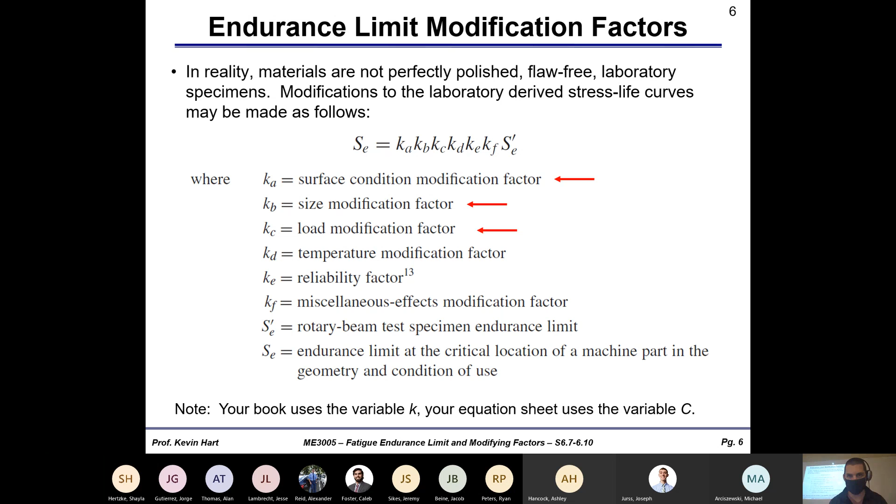Someone mentioned temperature - I think that was Jorge. There are temperature modifications as well, but we don't really deal with that in this class, just for time reasons.

Okay, so we talked about surface modification here. It's A times SUT to the B, where A and B are coefficients gotten from experiment, based on a variety of different surface types that we have. We did an example problem, then we talked about size correction.

Size correction is a little strange in that you're basically accounting for a variation in surface area to volume ratio. The more surface area you have on your piece, the higher the probability of your piece failing prematurely from this cyclic stress we're applying. This chart is trying to correct for the fact that you might have different sizes of pieces - and not just different sizes, but different shapes, and not just different shapes, but different loading types.

So we also talked about the difference between rotating and non-rotating bending. Rotating is like on a motor, where all points on the outside of the body experience the same maximum compression and tension, versus non-rotating bending, where only the top and bottom pieces experience the maximum compression and tension. We did an example problem showing rotating versus non-rotating behavior.

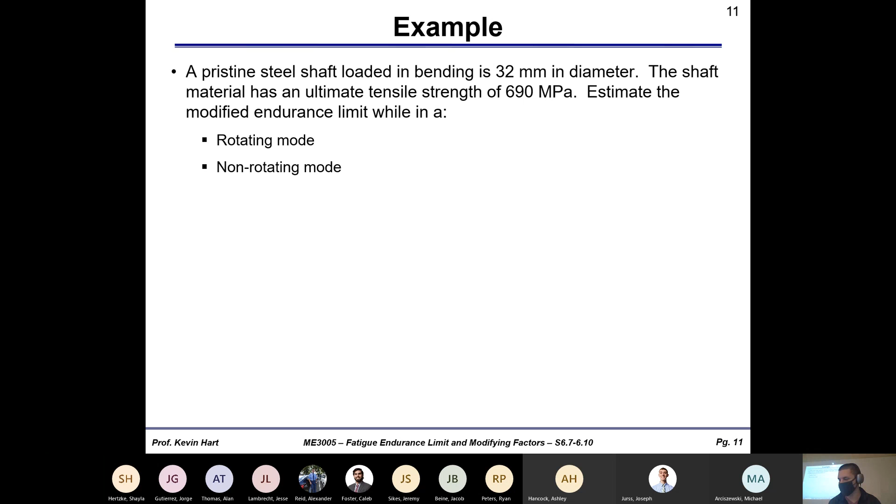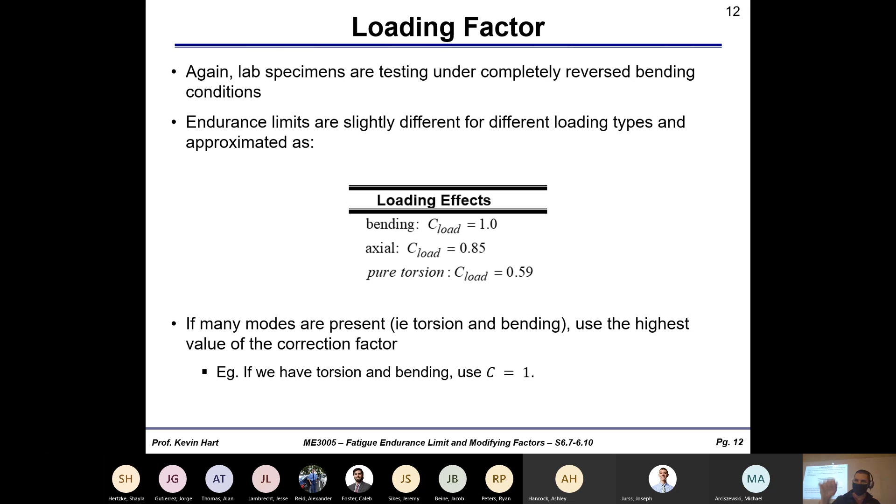Finally, we concluded last time with our correction factors looking at load corrections, modifying endurance limits for the loading types we might have. Bending looks like this, axial loading is like tension-compression over and over, and torsion looks like this - say, revving the engine on a motorcycle over and over, that's some sort of torsional effect.

We also talked about stress concentration factors - static and fatigue concentration factors. If you go to the back of any good mechanics textbook, you'll see a bunch of charts that lay out static stress concentration factors.

We talked about what those are, with the classic example of a hole in a plate. The idea is that stress is amplified around stress concentrators, like holes, fillets, or radii inside your piece. Stress is amplified in a static condition, following charts like this. If you have a certain hole diameter versus the width of the plate, you can determine your static stress concentration factor given that particular ratio. It's pretty straightforward.

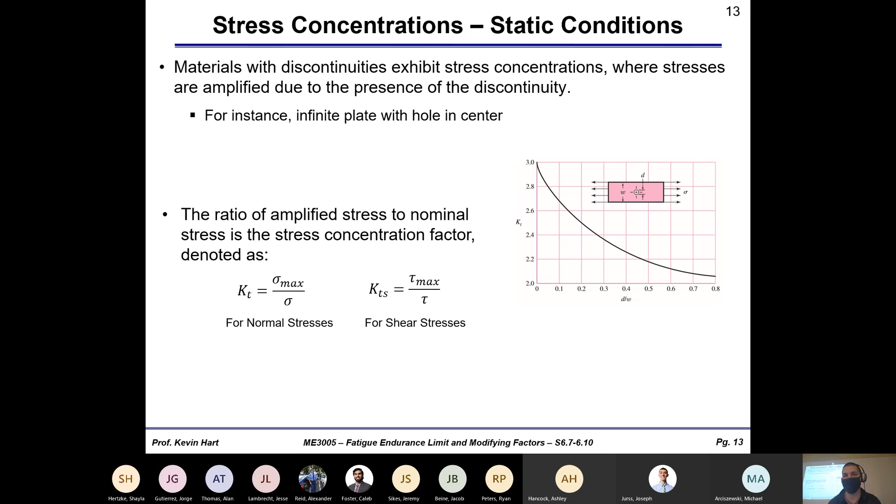This is pretty easy to get for static conditions, but we need an additional piece of information to calculate our fatigue stress concentration factor, and it's different than the static factor. So don't go and use the static factor on the test - you've got to use the fatigue concentration factor, which is slightly different.

The fatigue concentration factor is a similar idea - what is the maximum stress around this stress concentrator, a fillet, a notch, a hole, etc., divided by the stress amplitude that we apply, or the shear amplitude that we apply.

And we need an additional correction factor, which we call notch sensitivity. We talked about notch sensitivity last time - it's an additional constant based on how tough the material is, which will either further amplify or keep the static stress concentration factor the same as we move to a fatigue stress concentration factor.

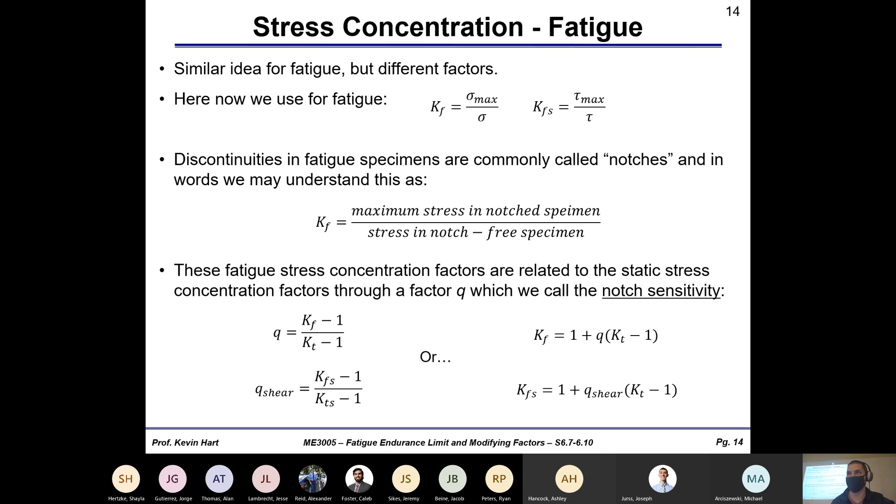Famous phrase - it is what it is.

Let's continue now with the lecture, and we're going to move on and talk now about... some of the - oh man, I have issues with my writing pad. Come on, turn it off, turn it back on.

Sometimes when I connect the writing pad, the pen doesn't sync up with where I'm actually touching on the pad. Okay, so turn it off, turn it back on, and it works, just like everything in engineering.

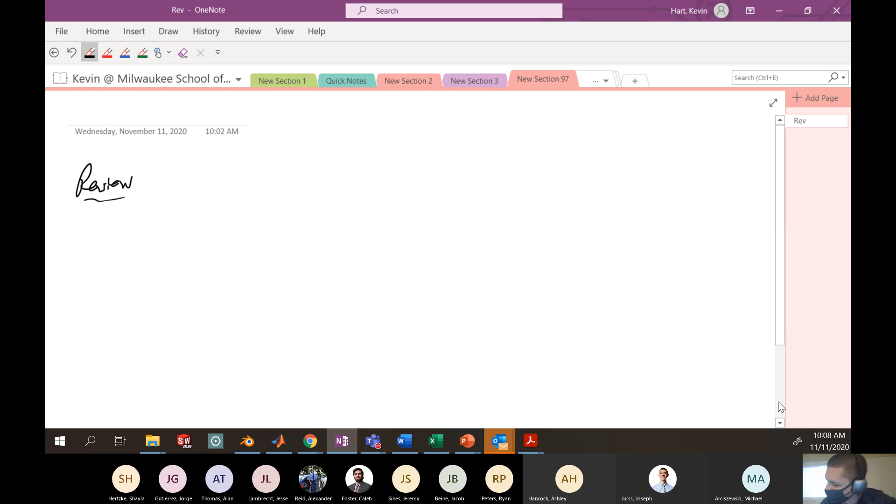All right, so what we've talked about so far, quickly: your endurance curve is something that looks like this. Number of cycles to failure on one axis, stress amplitude on the other. Here is your ultimate tensile strength, SUT, and we saw that we generally have lines that look something like this. This is a gross exaggeration, but you get the idea. And here, this is your endurance limit, SE.

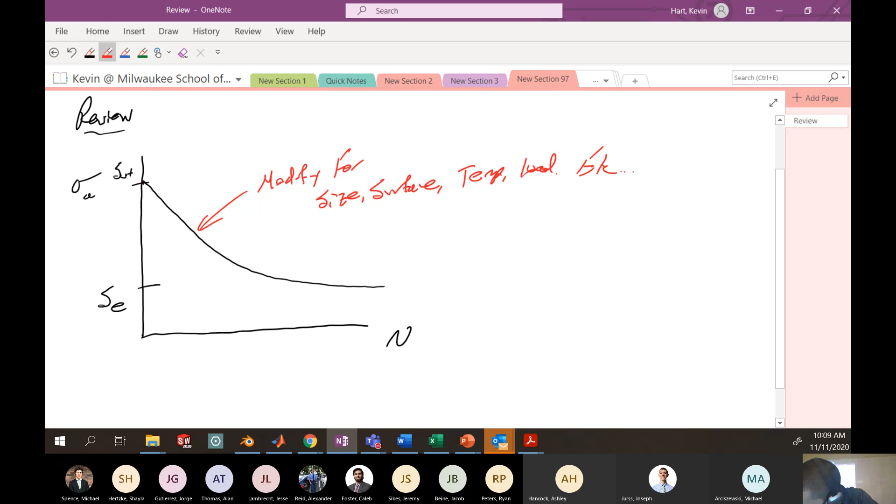And we know that we can modify this endurance limit and basically modify these curves for size, surface, temperature, load, etc. All the modifications we've done so far tell us how to modify this curve based on these phenomena. And so some modified curves that we might see might look something like this.

Oh boy, it's like that. I want it to plateau. So here might be some modified curve. You might get a modified curve that's slightly lower than what you get from the R.R. Moore high-speed test. So this here is like pristine test, and these are like modified.

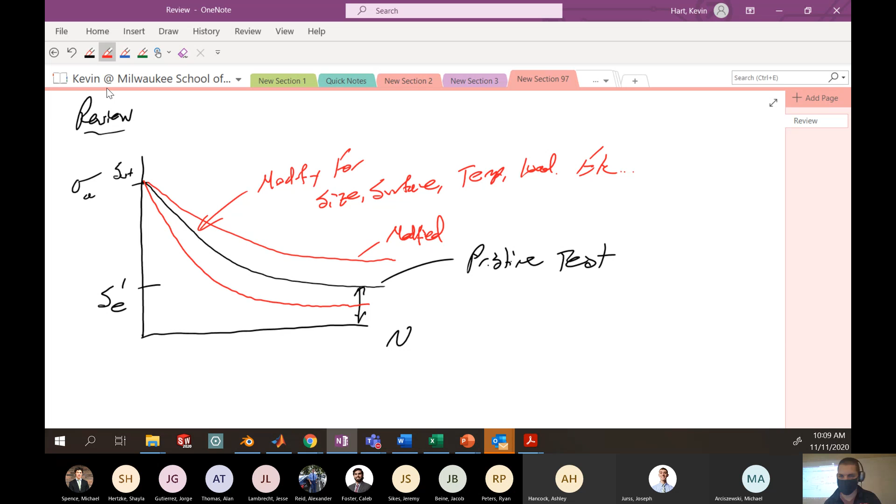If we run a pristine test, we get the pristine endurance limit, which is like this value here, which we know is SE prime. This is the pristine endurance limit. And the modifications that we've made based on size, surface, etc., are giving us these values here. This is like a modified endurance limit, SE, for size, temperature, etc.

We might also have a different modified endurance limit here, which is modified by size, surface, temperature. Maybe we have a much smaller size, so a higher surface area to volume ratio. Fine, we have a different modified endurance limit.

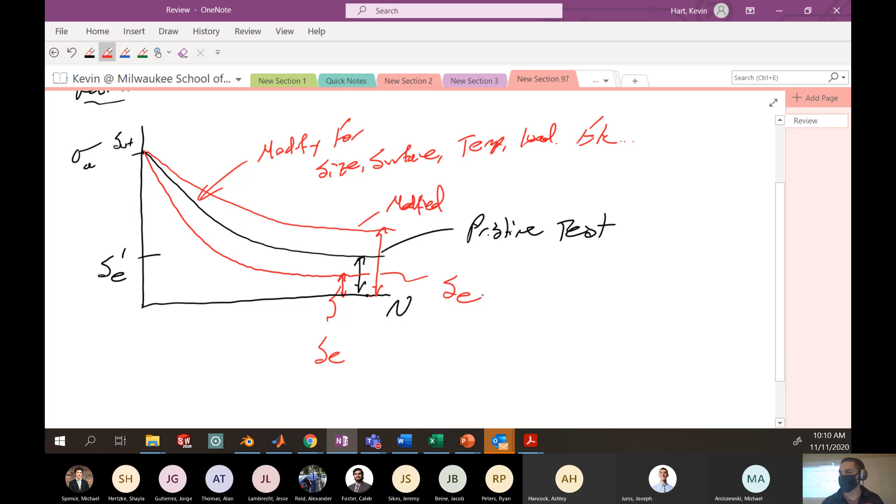So everything we've done so far has been just looking at how the endurance limit changes, how we get a modified endurance limit from a pristine endurance limit. But we're neglecting a huge portion of this endurance curve, basically everything that's going on up until the endurance limit. We're neglecting all of that information so far.

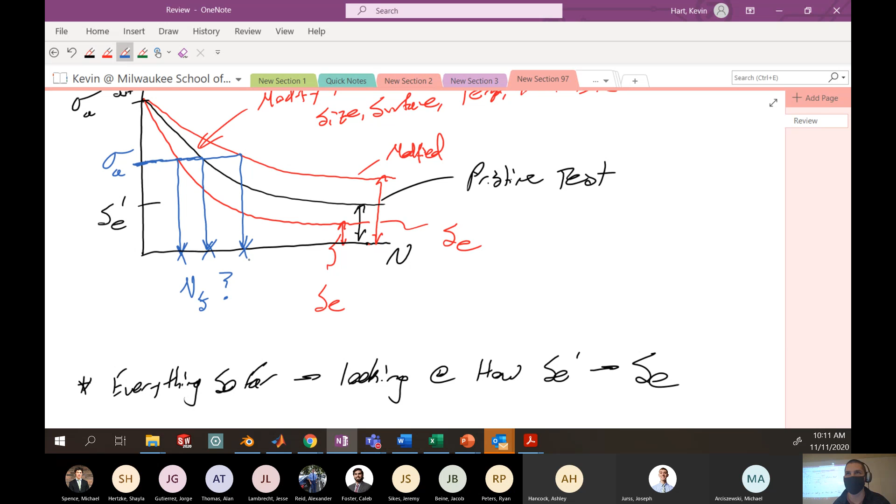Yes, it's nice that we can calculate a modified endurance limit, but what about everything happening before we get to the endurance limit? It would be nice if we could come up with some expression that allowed us to calculate: if I have some applied load, some stress amplitude here, how many cycles am I going to get to failure? Which would be like these x-axis values. It would be nice if we could come up with an expression based on modifications to the endurance curve that would allow us to predict number of cycles to failure given some applied stress amplitude greater than the endurance limit. Hopefully this makes sense.

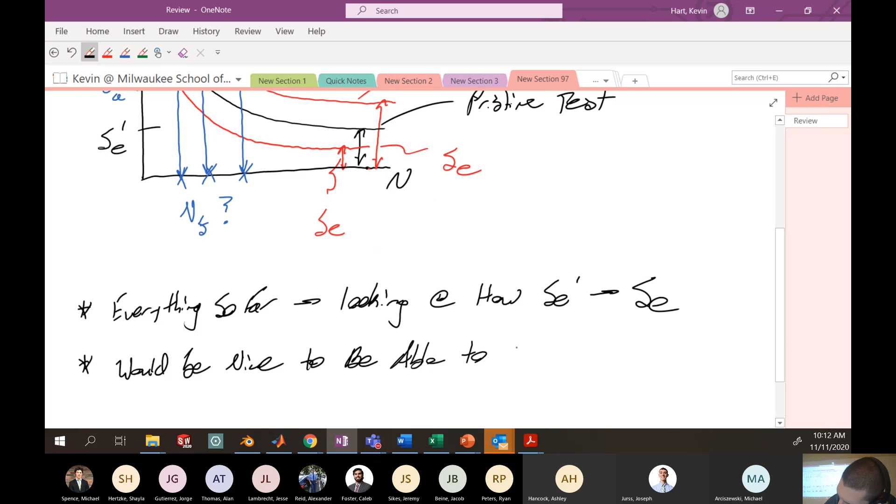So let's put this in words. Would be nice to be able to predict number of cycles to failure if my stress amplitude that I'm applying is larger than my endurance limit—a modified endurance limit. So take into account the size, take into account the surface, take into account the loading type, etc., and then modify what that endurance curve looks like, and give us some prediction for what is this number of cycles to failure given some stress amplitude.

Would be nice. There are a lot of models that do this. We're only going to talk about the model that is specifically used for steel with high cycle failure. There are many models that do this, but we're specifically going to focus on just one because, you know, complicated.

Just a second. My notes not include... oh, my notes aren't including this information. I think I might have given you guys a bad set of notes. Do you guys have slides 15 and 16 on your electronic copies of your notes or not? Oh yeah, okay, you do have it. For some reason I just don't have it here in front of me. But that's okay, I can make it happen. All right, so let's talk about this: estimating cycles to failure. I don't need no notes.

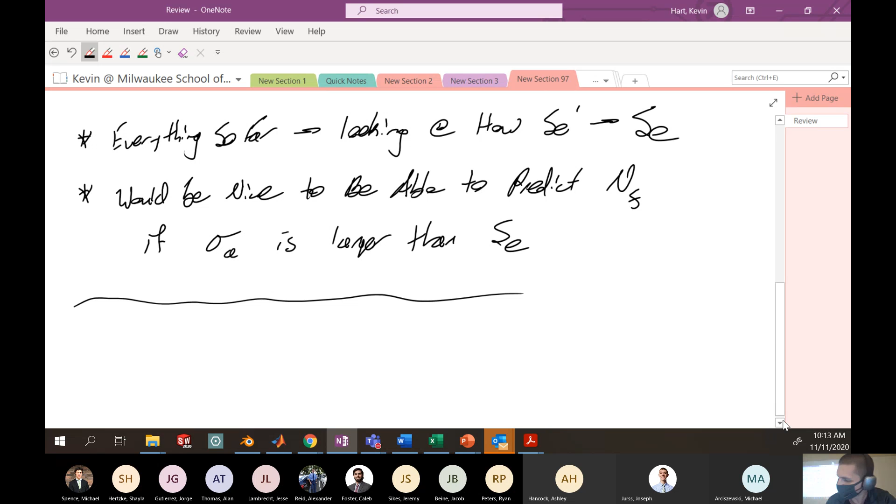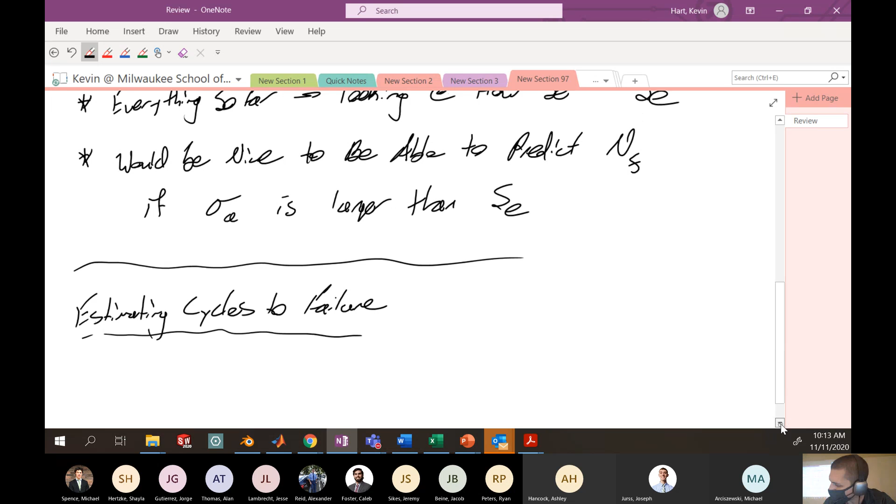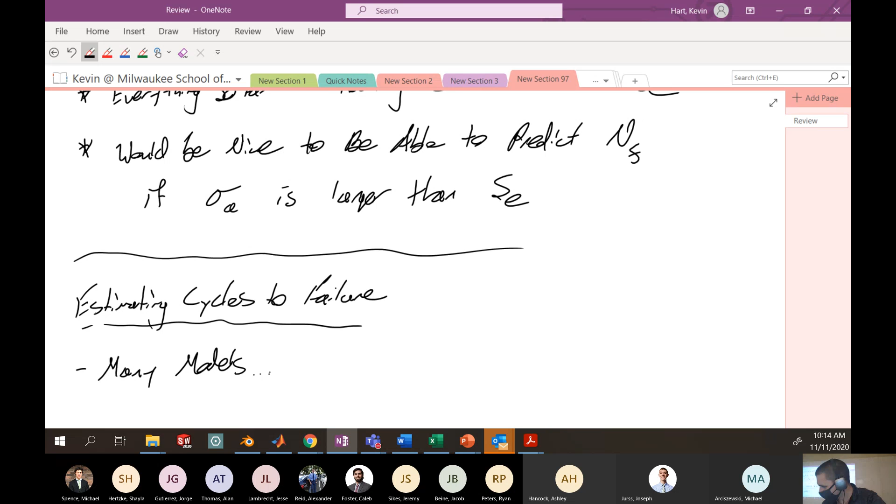All right, there are many models that exist. The only one we're going to focus on here is a model for completely reversed stress.

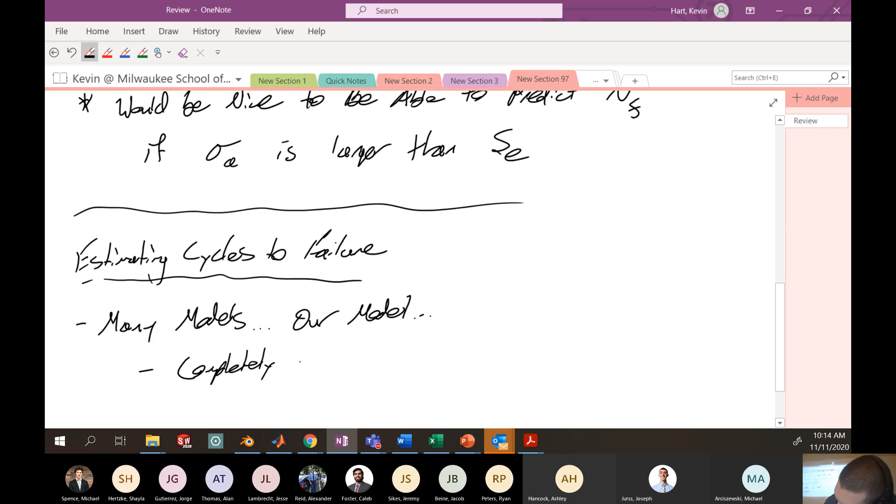Has the following: completely reversed stress state. What this basically means is that my mean stress is 0. Remember when we talk about cyclical fatigue that we apply, when we have completely reversed stress, that means we have an equal amount of compression and tension being applied on our piece. So the mean stress is 0.

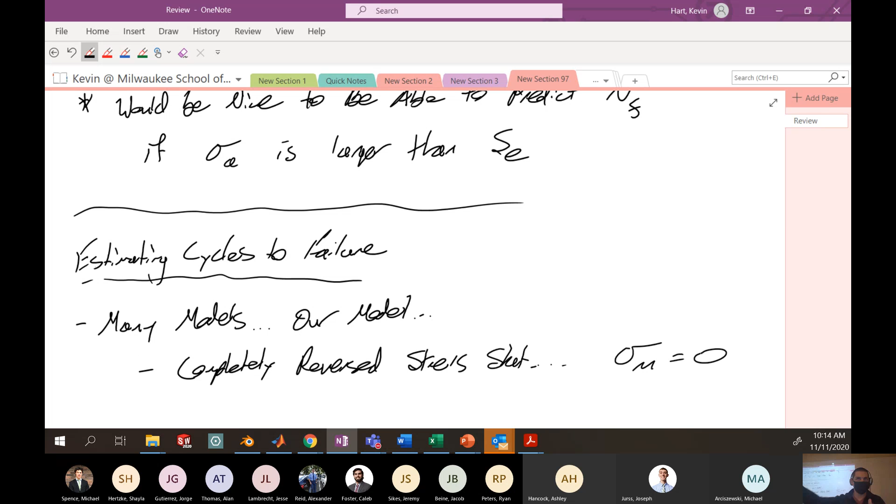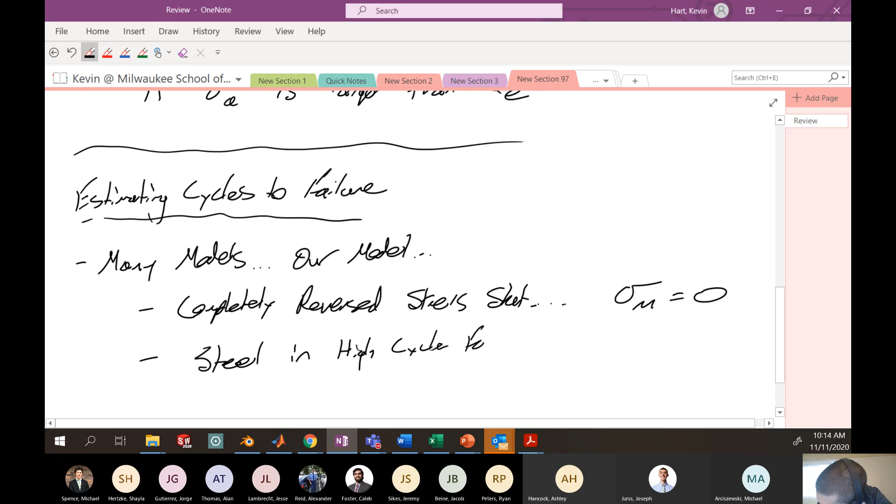And we have steel, which is in sort of high cycle fatigue. So what do I mean by that? We have numbers of cycles to failure that are somewhere between, let's say, 1,000 and 10 million. So 10 to the 7th on the high end, and on the low end, 10 to the 3rd. That's approximately the values that we want.

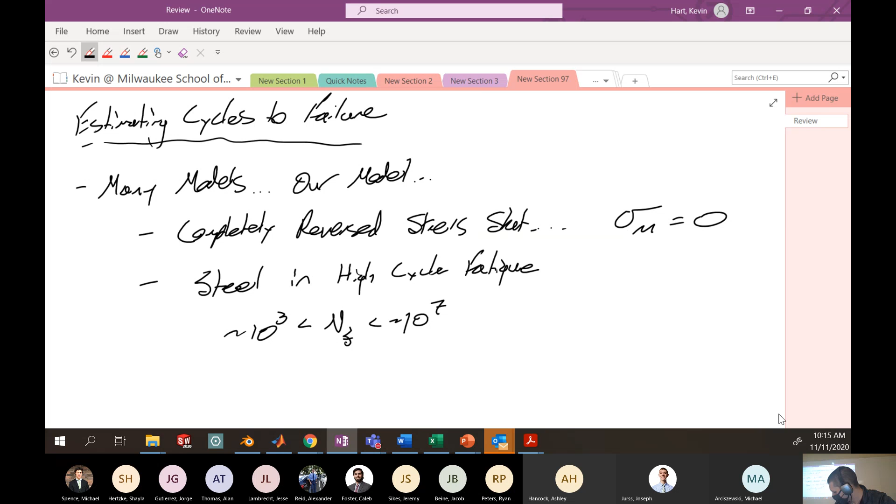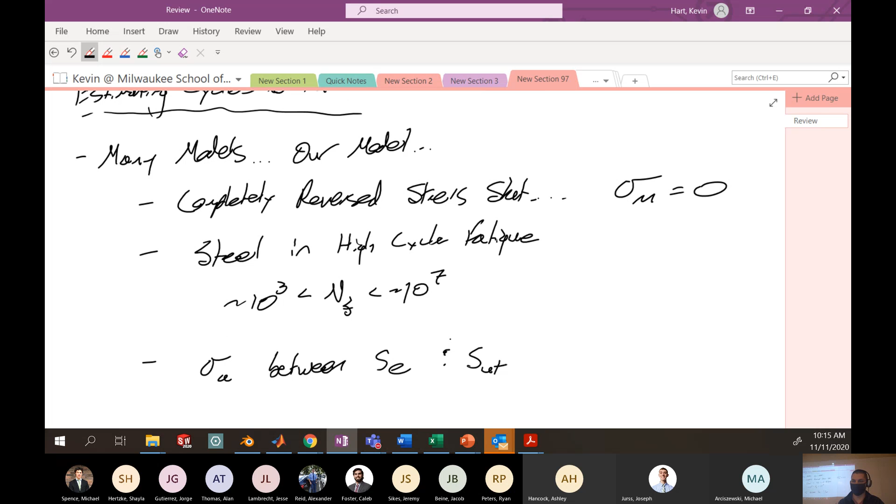And the last thing I'll say here is that we have to have a load that's applied between the endurance limit and the ultimate tensile strength, obviously. That gets us in the region that would give us some predictable cycles to failure. If you have a stress amplitude that's below the endurance limit, you're never going to fail. And if you have a stress amplitude that's above the ultimate tensile strength, you're just going to fail after one cycle. So that's the general range we're interested in here.

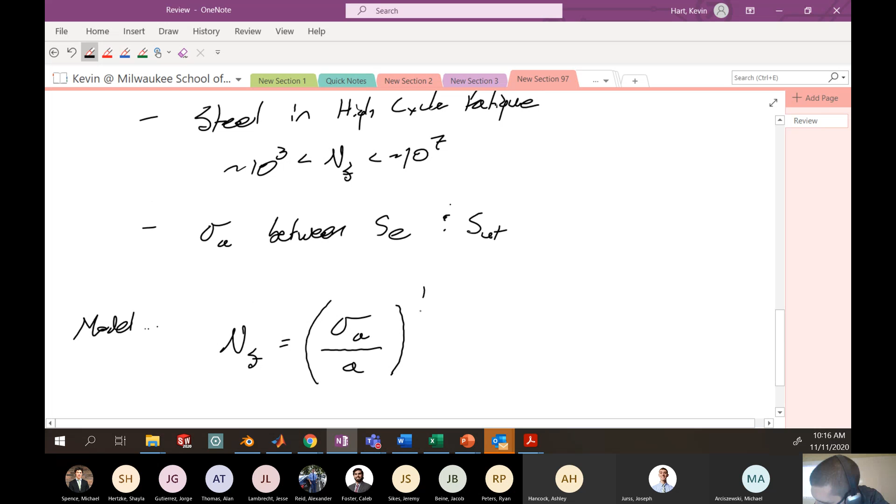Okay, so here's the model. And again, this is empirical, but here's the model: number of cycles to failure equals the stress amplitude divided by a constant A. This is not the same constant A from surface modification, this is a different constant, raised to the one over B. So here's your model with all those assumptions laid out.

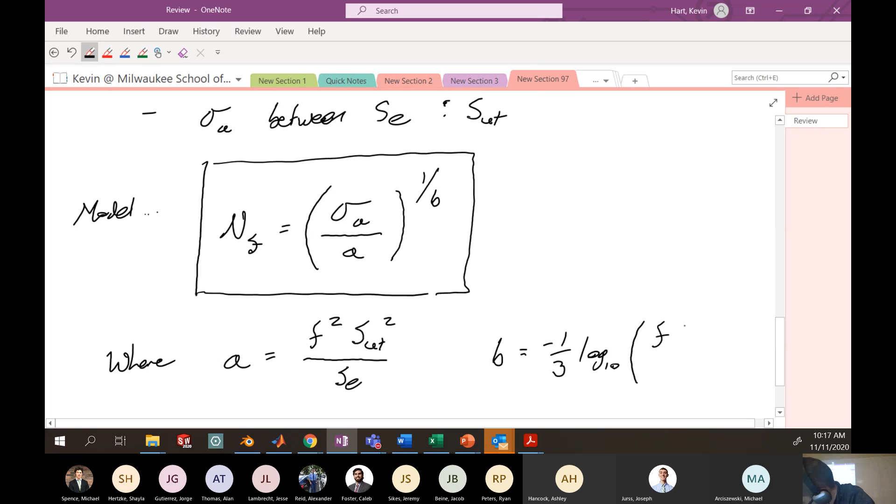We have some constants we need to worry about. This constant A here is what we call the fatigue strength fraction, little f squared, times the ultimate tensile strength, SUT squared, all over the modified endurance limit, SE. B is negative one-third log base 10 - this is not natural log, it's base 10 - of the fatigue strength fraction f, SUT ultimate tensile strength, over modified endurance limit.

Okay, I'm not going to define these, I think all these things are kind of well defined, except maybe we should define little f. This is the fatigue strength fraction.

The fatigue strength fraction, this just comes from experiment. Everything just comes from experiment. Just do experiments - if you don't know what you're doing, just do an experiment. That seems to be the method here. So let me get my fatigue strength fraction chart.

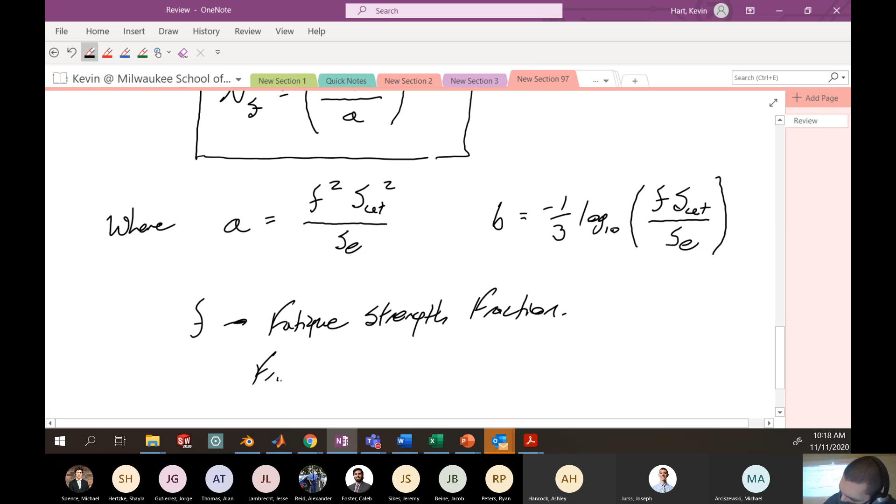Here it looks something like this. This kind of comes from your Shigley book. The fatigue strength fraction F, this little script F here, is based on the ultimate tensile strength of the steel that you have. So the lower the ultimate tensile strength, the higher the fatigue strength fraction. And here it's going to range usually from like 0.75 to 0.9, depending on the ultimate tensile strength of your steel. So a lot of just empirical stuff that you have to keep track of.

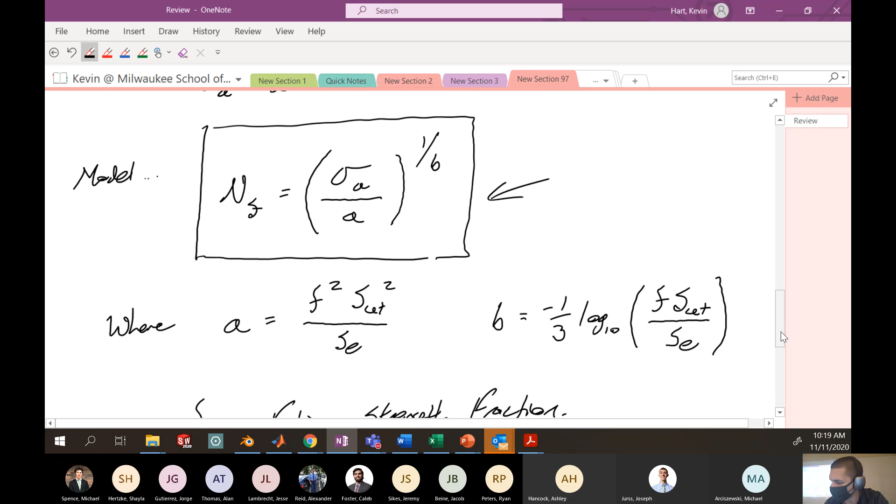So there you go, that's your model for calculating cycles to failure, given some stress amplitude that's applied between your ultimate tensile strength and your endurance limit. So specifically for steel, specifically for high cycle fatigue.

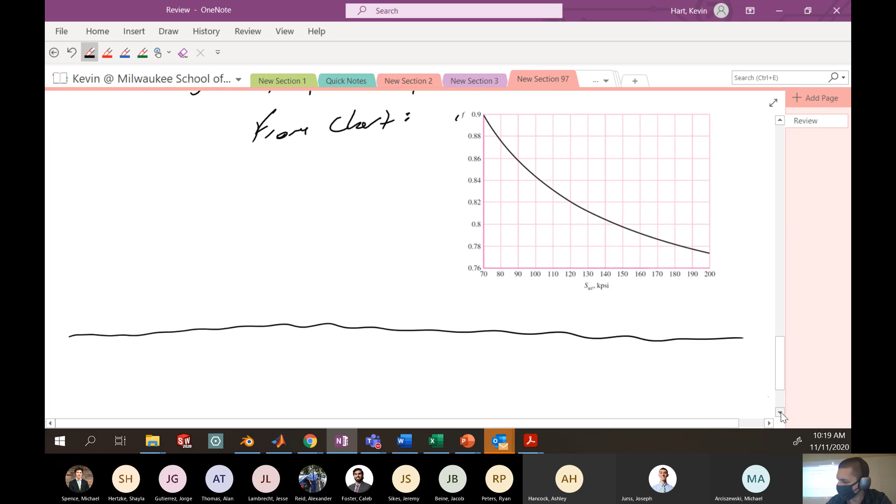Let's put it all together, let's do an example. A complicated example, but it is one that sort of brings together every single thing about fatigue that we've talked about so far. This comes from page 17 of your notes.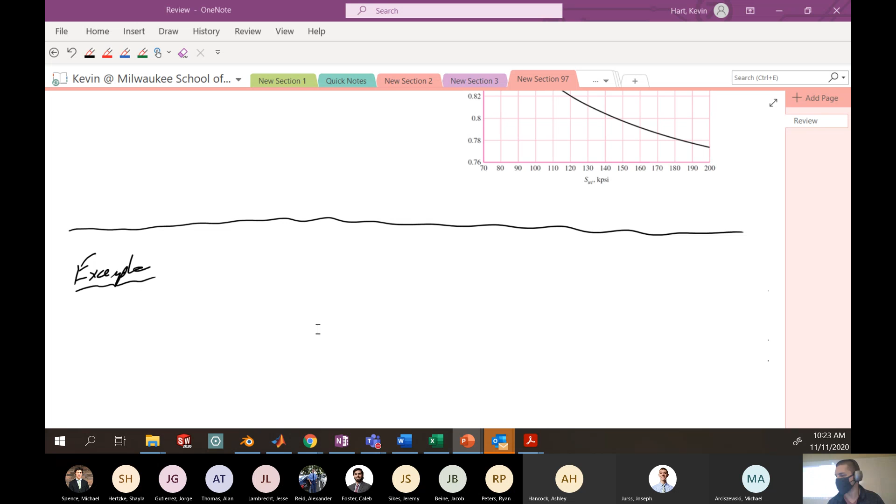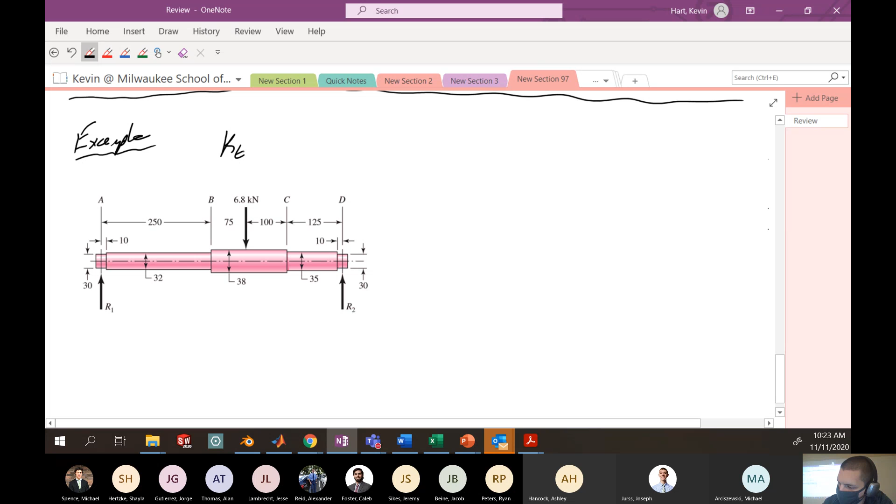Okay, so here we are. This is sort of the shaft that we have in question here. A couple pieces of information that I'll note here. We have static stress concentration factors at each one of the shoulders, which is 1.65. It's important to know.

We have ultimate tensile strength, 690 MPa. This is made out of steel. And we have a yield stress, which will come into this later, 590 MPa.

First thing we're asked to find, part A, the modified endurance limit at point B, which is here on the structure.

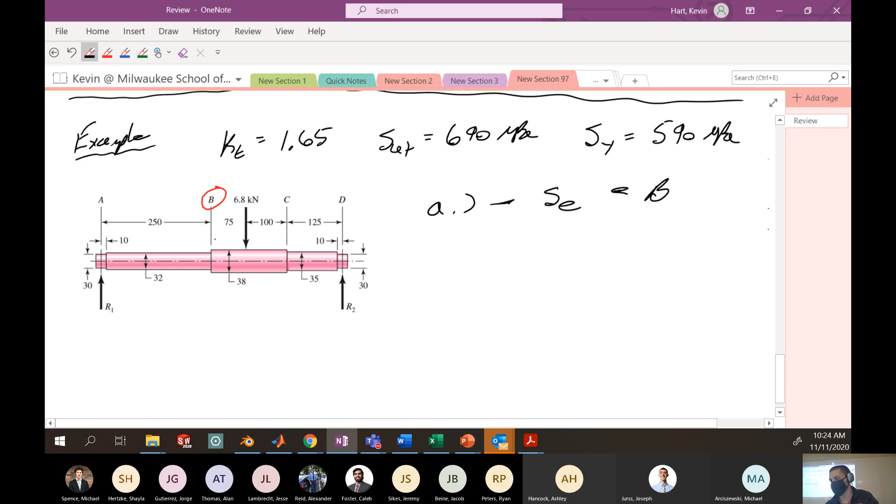This is kind of our point of interest here. We can see we have like this shoulder going on here, so this is going to be important to us. It's where we're going to have stress concentrations and our highest likelihood of failure. All right, so let's do it.

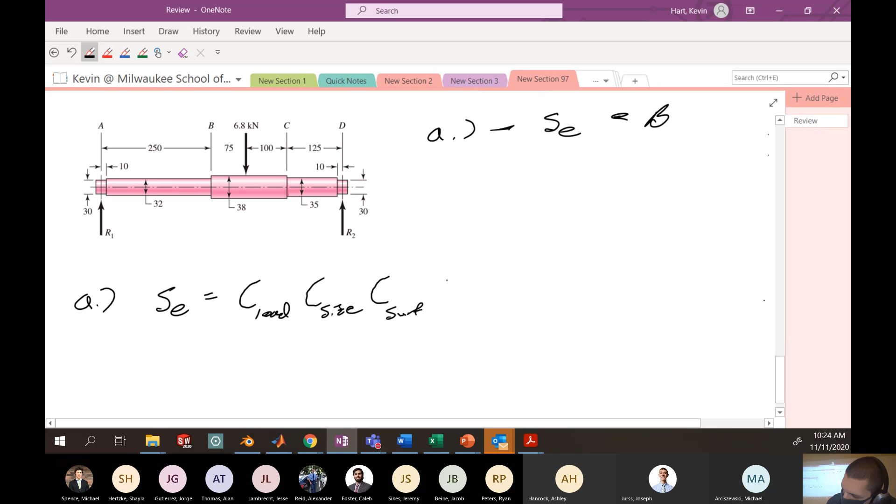Generally, if we want to calculate the modified endurance limit, we'll use our correction factors. So the modified endurance limit includes all of the ones we've talked about so far: load modification, size modification, and surface modification, all modifying the pristine value. This is our general strategy.

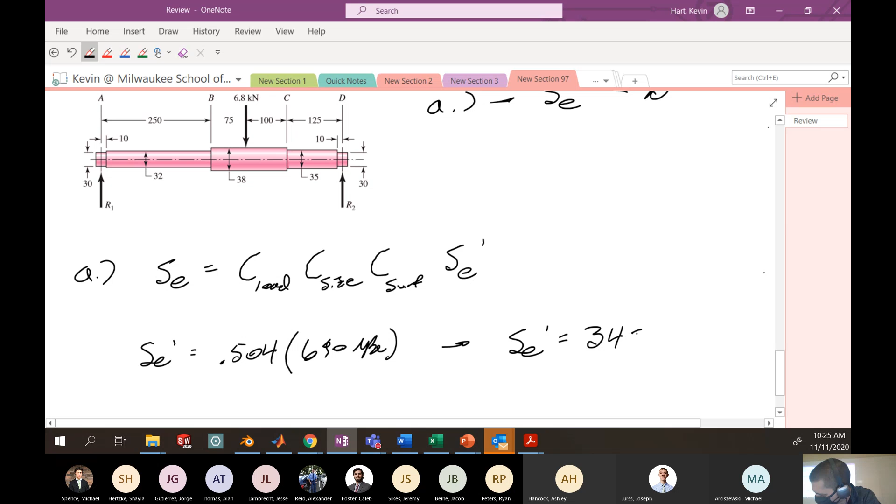My ultimate tensile strength, 690 MPa. So I'll have a pristine endurance limit here, 340... 348 MPa. Kind of an important intermediate value that'll feed into the right-hand side of the equation above there.

Okay, load correction. This one's kind of easy. We'll go to our equation sheet or notes and see what is the load modification for bending. Since the RR Moore test is done in bending, our load modification is going to be 1 here.

Since we have a bending situation, we're in like 3-point bend with this current configuration, our load modification equals 1, and it's because we're in bending. So we don't really have to modify for our load condition, which is nice to know.

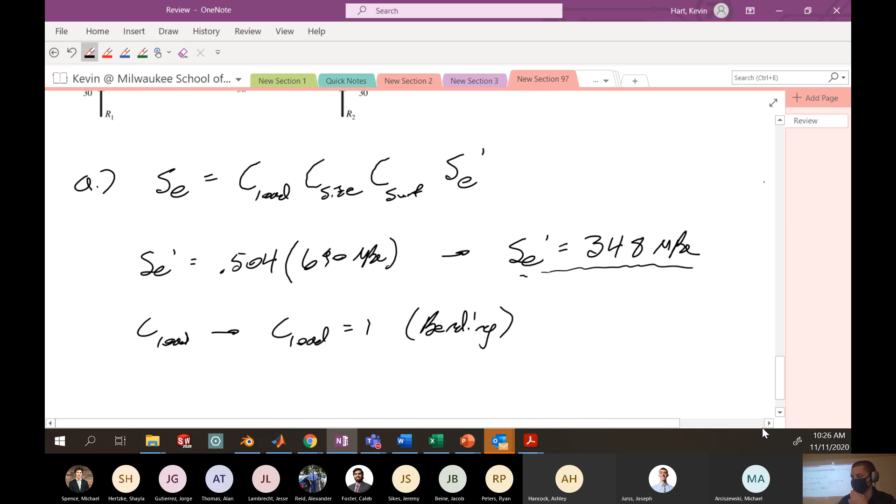All right, next maybe we'll do the surface. The surface is kind of the next easiest. Remember, our general formula for that is like A times Sut to the B. We're told in this particular problem that we have a machined surface, so maybe we'll make a note here.

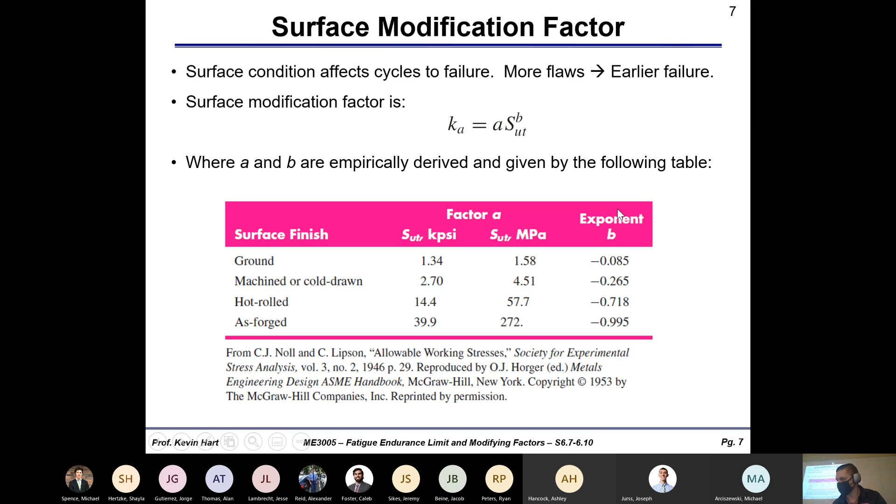We'll go to our equation sheet, look at our chart. We're in metric units here, so for a machined piece, something with a machined finish, the value of A that we want in metric units is going to be 4.51, and the exponent B, negative 0.265. So that's for this machine surface, okay.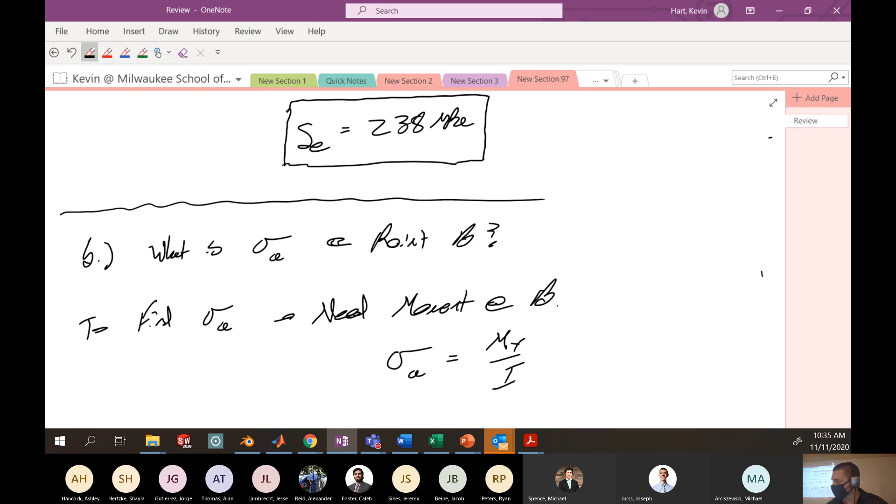Where m is the moment applied, either positive or negative, at that particular location. Furthermore, I need to modify what I would normally calculate as the amplitude by the fatigue concentration factor. So the total stress amplitude is the fatigue concentration factor times moment over I. So I need all of these things specifically at point B.

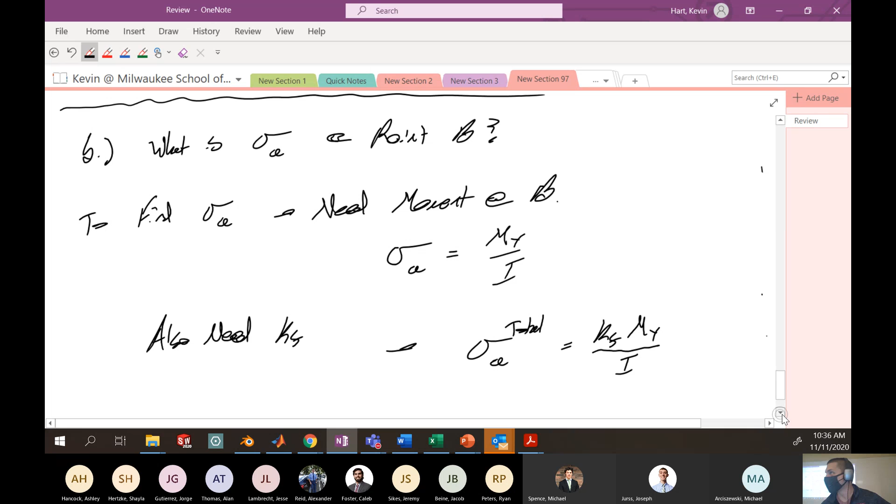So that's where we're going. Now, all of you are going to cry because we have to figure out what the moment is at point B, which requires a shear and bending moment diagram from statics. So let's hear it, come on, let's all grumble. Grumble, grumble.

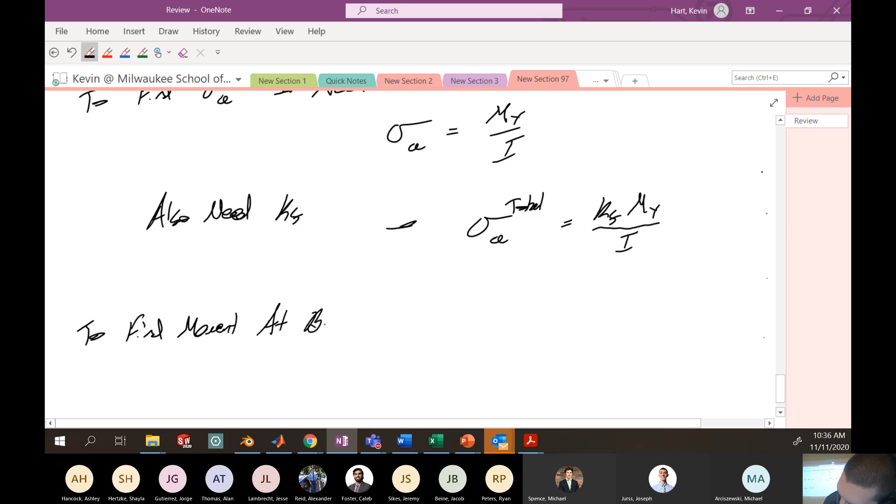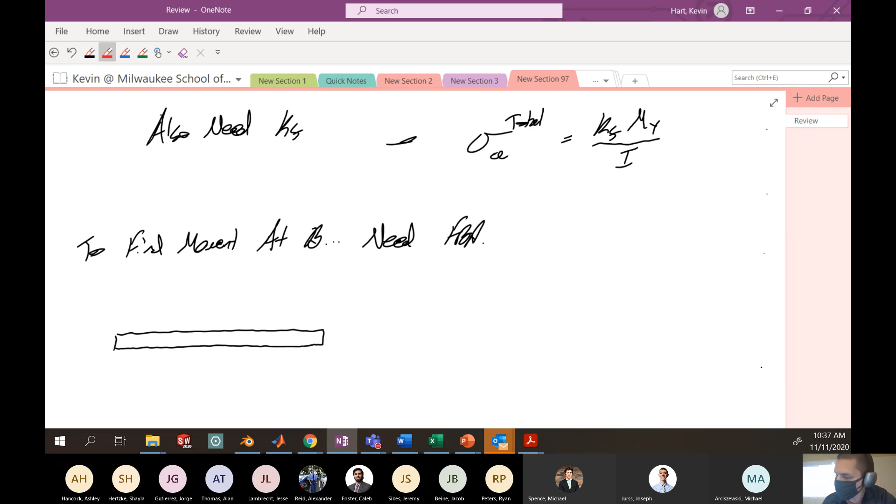Yeah, okay. All right. So to find moment at B, I need a free body diagram. So my shaft, I'm just going to draw it as one shaft here because the dimensions of the shaft are not particularly important for me at this time. The important bits are that I have 6.8 kilonewtons somewhere over here.

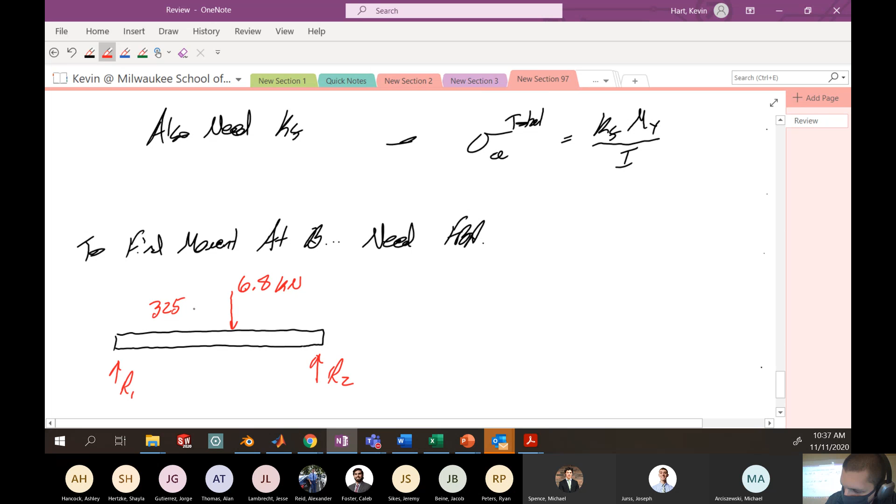I have a reaction force R2, and I have a reaction force here R1. You can go back to the figure and remind yourself what the dimensions are to the 6.8 kilonewtons, but it's going to be something like 325 millimeters. And on the right-hand side here, we have 225.

If I give you something like this, using information from statics, you should be able to figure out what R1 and R2 are. Using statics, that's the sum of the forces equal to 0, or the sum of the moments equal to 0. Let's say you can do that about either the left-hand side or the right-hand side. You'll get that the reaction force R1 is 2.78 kilonewtons, and the reaction force R2 is going to be 4.02 kilonewtons. Together, that best add up to 6.8, or I done messed up.

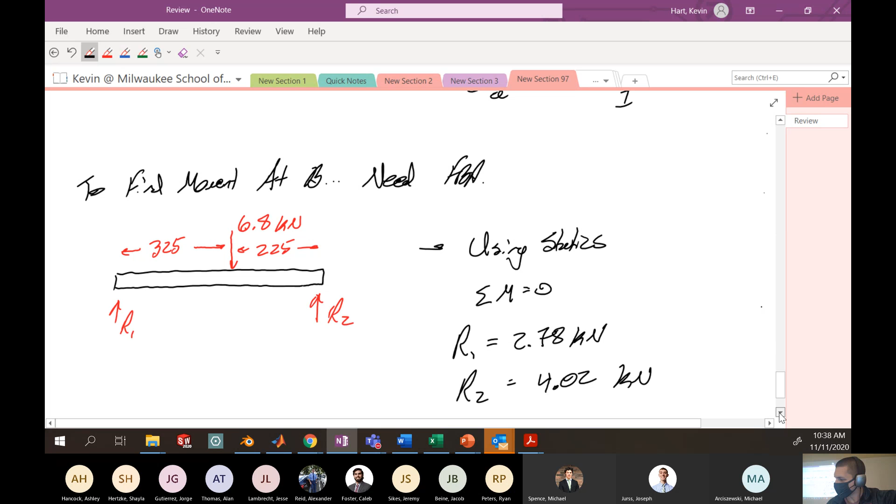All right, I still have not found what is the moment at point B. I'll remind you that point B is somewhere over here on this structure, specifically 250 millimeters from the end. So there are a variety of ways that I could calculate what is the moment at B.

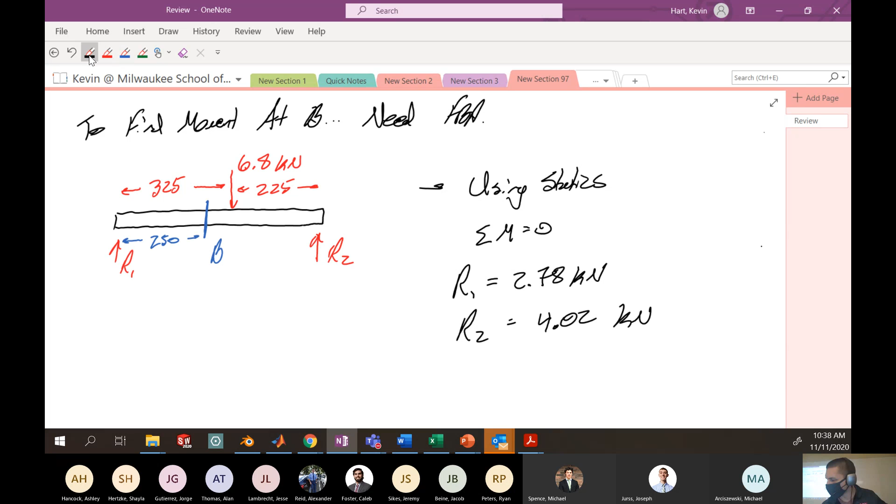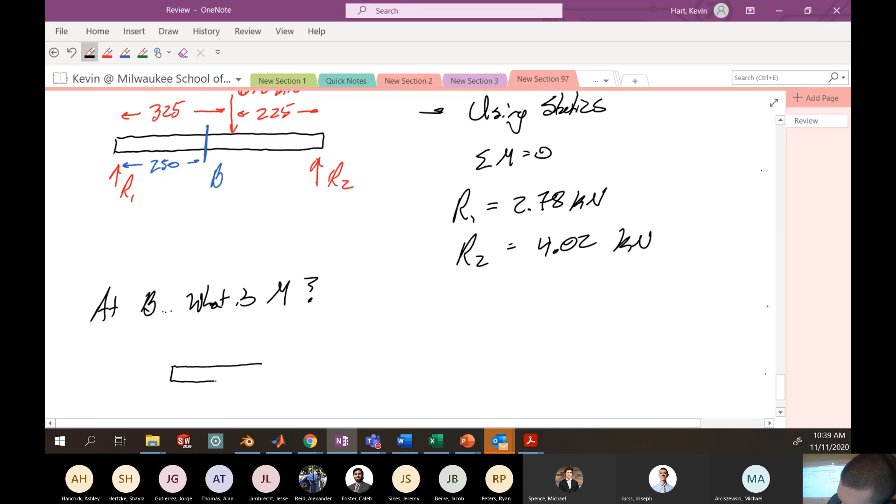The easiest is probably to just cut through that blue line there on your beam. Okay, so here we are, this is point B. We've got this R1 force pointing upward here, 2.78 kilonewtons. I've got a distance to point B, 250 millimeters. And when I make this internal cut, I'm balanced by a shear force at point B and also by an internal moment at point B.

Okay, getting nightmares from statics yet? Yeah, you are.

Okay, basically the idea here is that the moment at B, once you do all this analysis correctly, you're going to get 2.78 kilonewtons multiplied by this moment arm that exists, which is 0.25 meters. And so you'll have the effective moment at point B from the loading situation that we have right now, 695 Newton meters.

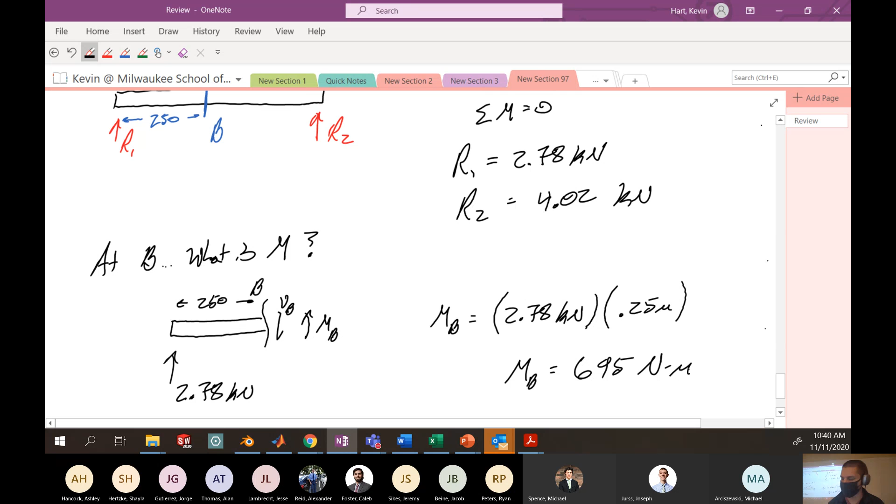This is going to feed into the stress that we calculate at point B. So this is just another intermediate value here. All right, continuing.

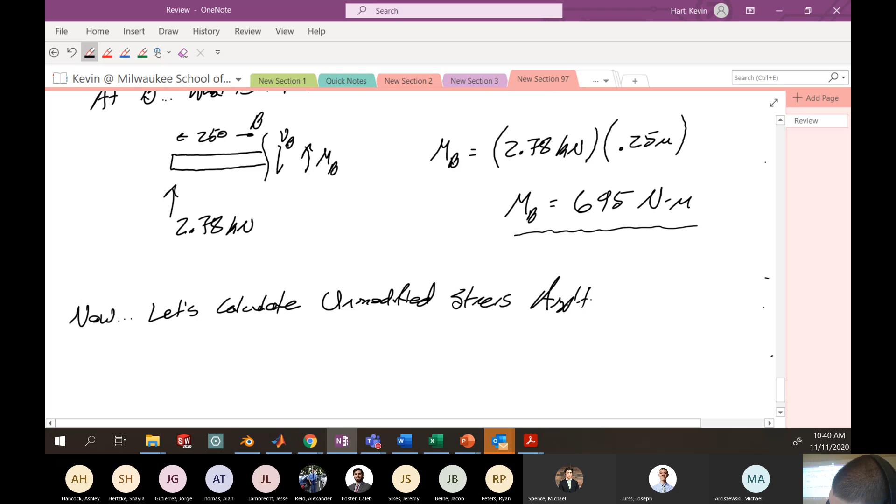Now, let's calculate unmodified stress amplitude. What do I mean by unmodified? We're not modifying it by any concentration factors at this point. So let's call it an unmodified value, stress amplitude prime.

This is specifically at point B. This is going to be something like the moment at B times this variable y, which we'll talk about in a second, over the area moment of inertia I.

Again, I want conservative estimates for what the stress is at point B, so I'm going to take this smaller section of the shaft. Here, when I calculate the stress amplitude unmodified by any concentration factor, it's just the moment at point B, 695 Newton meters, multiplied by y. That's the distance from the center of the cross section to the point where the highest stress would occur. That's the outside, which is the radius of this piece. So if the diameter is 32 millimeters, then we have 0.016 meters.

This is all over the area moment of inertia, smaller area moment of inertia here. Pi on 4 times the radius to the fourth, 0.016 meters.

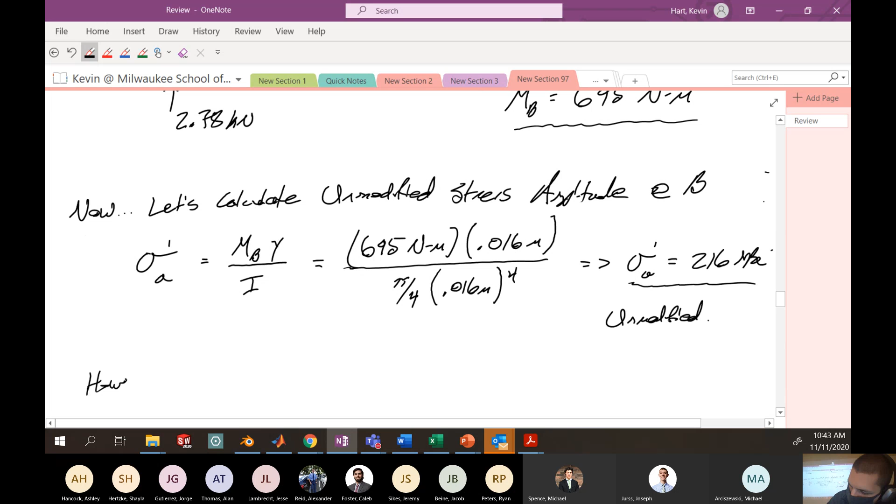So, however, at the shoulder, we're told that we have a fillet radius, which is r equal to 3 millimeters. And we're also told that we have a static stress concentration factor KT of 1.65. All right.

I still need this modified stress amplitude to continue with my problem. So this unmodified amplitude, multiplied by the fatigue concentration factor, Kf, gives my modified stress amplitude. So I need the fatigue concentration factor.

The fatigue concentration factor is not the static stress concentration factor, all right? Remember that this fatigue concentration factor, if you go back to the notes, is something like 1 plus Q times the static value, KT minus 1.

I know this KT value, it's right up there, 1.65, but I need this value of Q. Remember, this is my notch sensitivity factor. This value of Q is obtained from some of the charts that we've shown before.

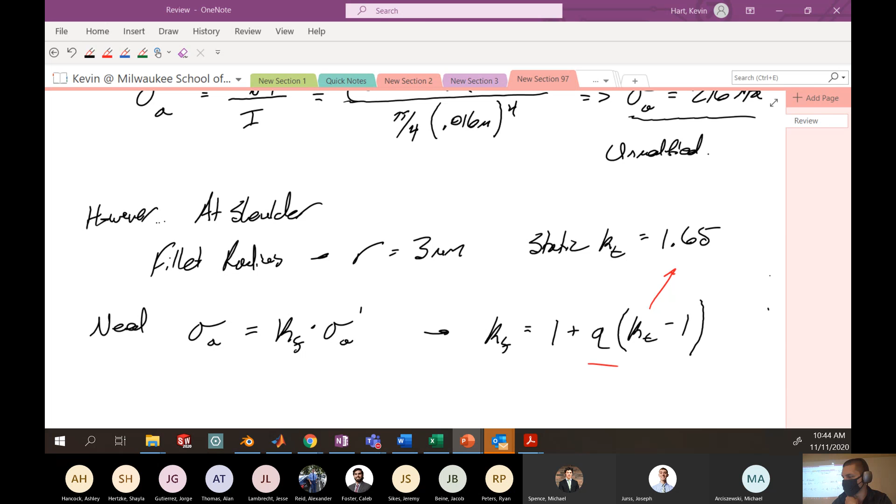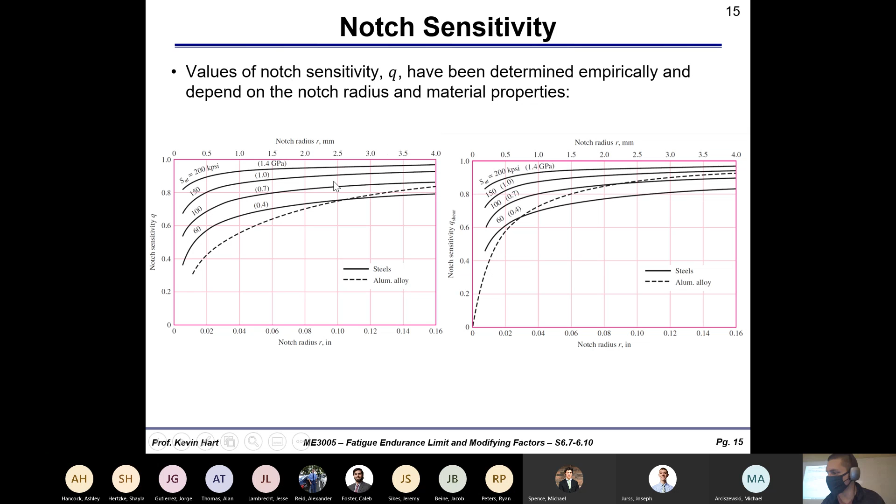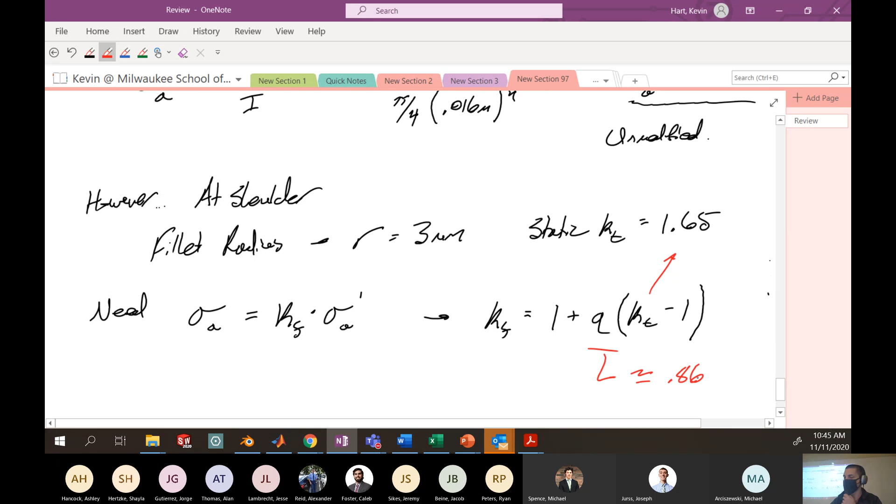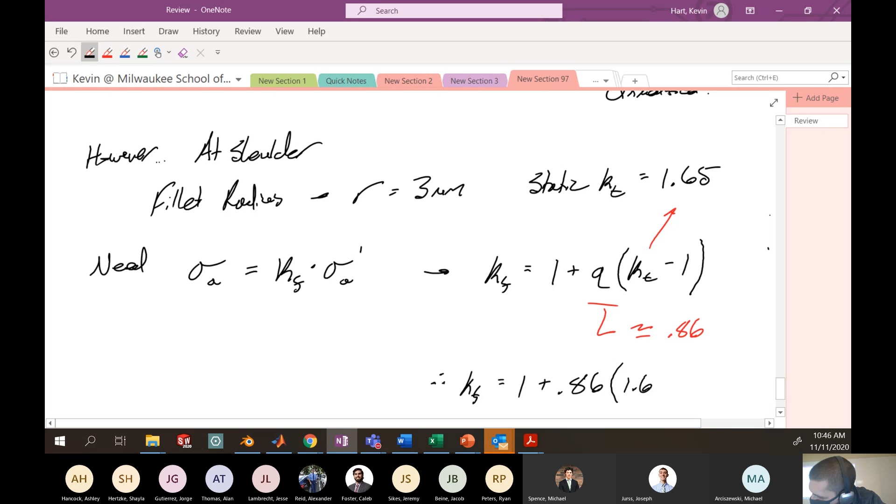All right, my fatigue concentration factor then is 1 plus 0.86 times my static value, 1.65 minus 1. Put this all together: my fatigue concentration factor in this problem is 1.56.

Don't get dyslexic on me now.

So finally, my fully reversed stress amplitude at B after all modifications - this is going to be my fatigue concentration factor, 1.56, amplifying the stress that I would have calculated if there were no shoulder at point B, which we calculated above using my M over I as 216 MPa.

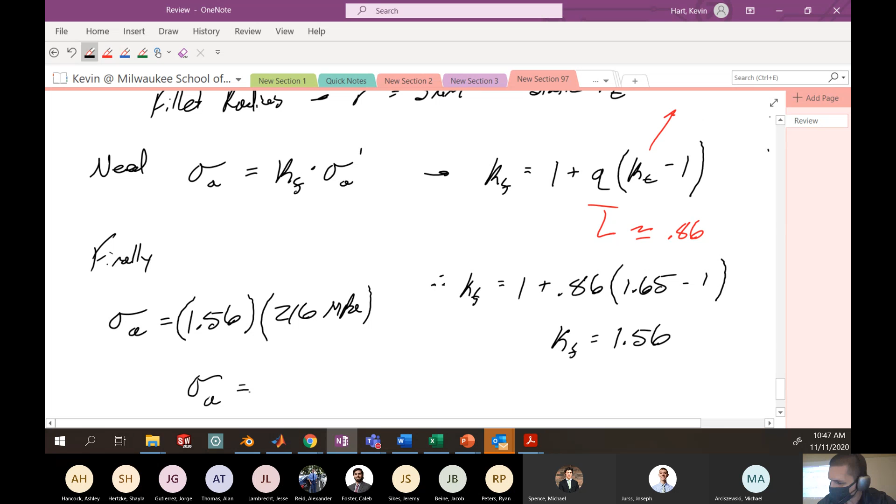Hopefully you're all starting to see how annoying these fatigue problems are. Put this all together, 337 MPa. That is the stress amplitude at point B under this particular situation.

I want to quickly bang out part C and then we'll do part D on Friday.

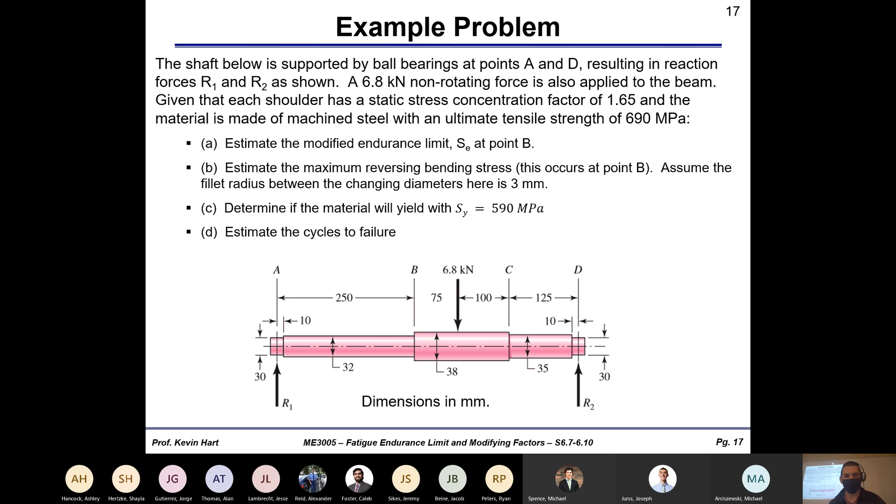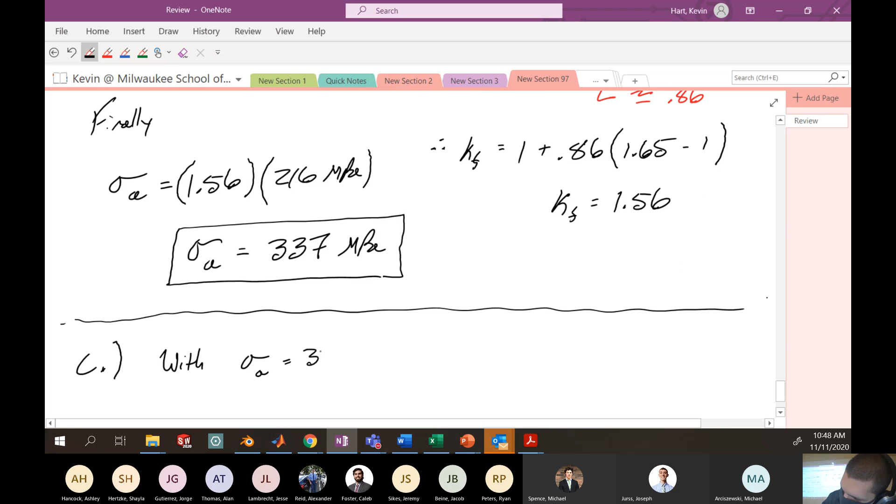All right, part C: determine if the material will yield if the yield stress is 590 MPa. Okay, this one's pretty quick. We're told the yield stress here is 590 MPa.

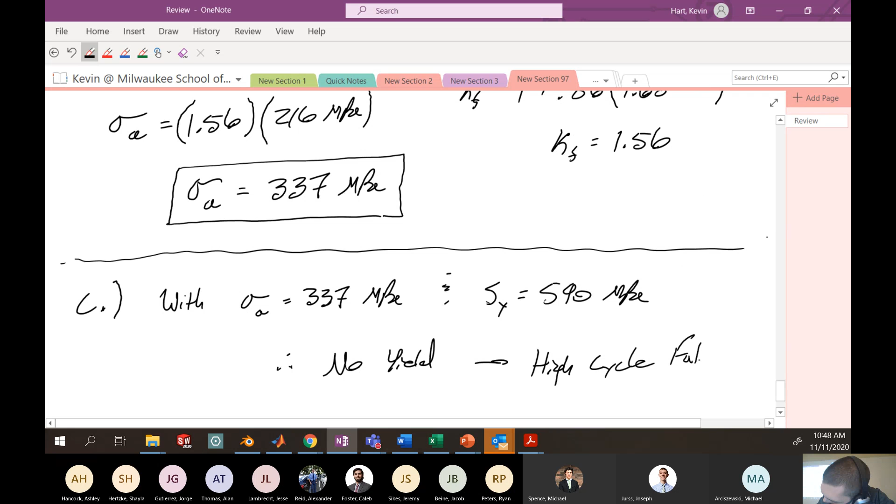No yield. What does that mean? That means we're in high cycle fatigue, because I have no plasticity. This is important because it means that we can apply that model that we previously talked about - a steel material, high cycle fatigue, we can apply it.

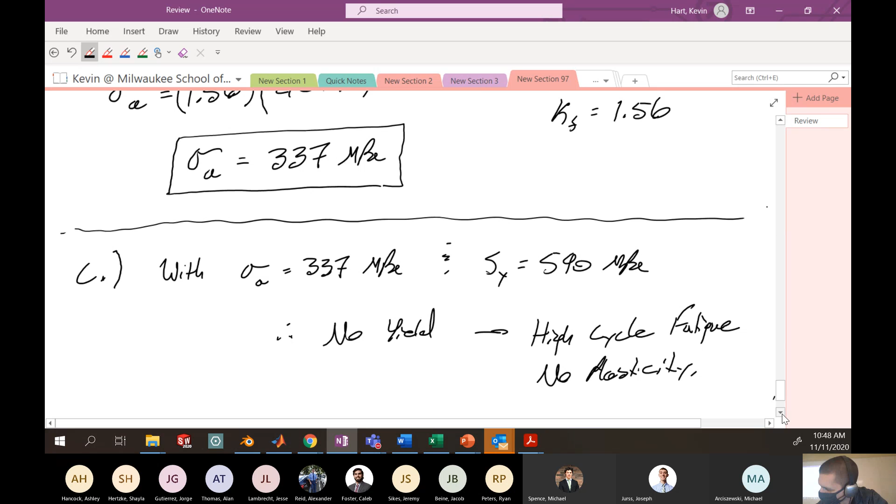A prediction of number of cycles to failure, which remember is something like your stress amplitude over this variable A to the one on B. We're basically setting up part D for this problem, which is estimating number of cycles to failure, that this is going to be a valid calculation.

All right, so we hit 10:50. I was hoping to finish this problem today, but maybe we'll just take 5 or so minutes on Friday to do it. All right, that'll be it for today.